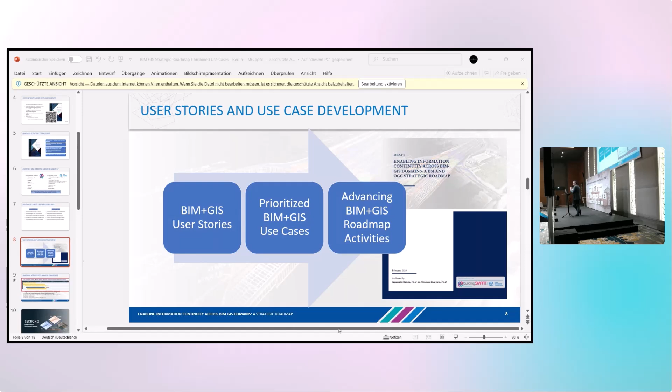So you see sheets in front of you on your tables. You will see a heading. There is a table, and there's a heading to the table. The heading is the use case category. What's in the table is a use case, which is a complete use case that drives a process from one end to the other. We'll get to those sheets in a minute. That's mainly our exercise today.

So the committee met, and we looked at prioritization of these use case categories. We had many categories. What you see across the room is 5 use case categories that we have prioritized. We probably had 10 to 12 use case categories. Under each category, we had distinct use cases. So that's part of the roadmap development, to collect that feedback from bottoms up and prioritize them, and then figure out how to drive standardized toolkits to advance the BIM GIS roadmap activities further from there.

So the first breakout and workshop exercise will be a Menti exercise. I hope you all have your smartphones ready because you'll be using them a lot. Everybody's got one? Okay, I'm sure you all have one. So, all right, I'm going to share my screen now and take you through a Menti exercise.

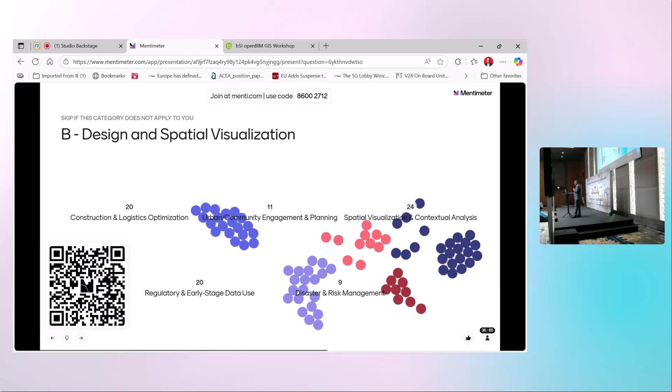So on design and spatial visualization, looks like the lead is with spatial visualization and contextual analysis. We've seen so many good examples, even at this conference, that technology is really changing, and we're able to put our infrastructure into context much better now, whether through standards or through integrated technology sets working together. So that seems to have the lead, and regulatory and early stage data use and construction and logistics seem to be tied. So yes, we have a top 3 definitely identified there.

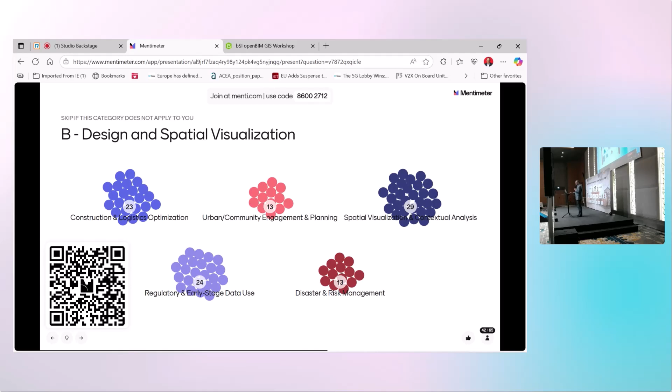And here it is, data integration and requirements. Certainly requirements, particularly on the buildingSMART domain side, our data tends to be contractual in nature. So very important on the requirements and how we put it into contracts, because we are bound in many cases to deliver data that is contractually obligated.

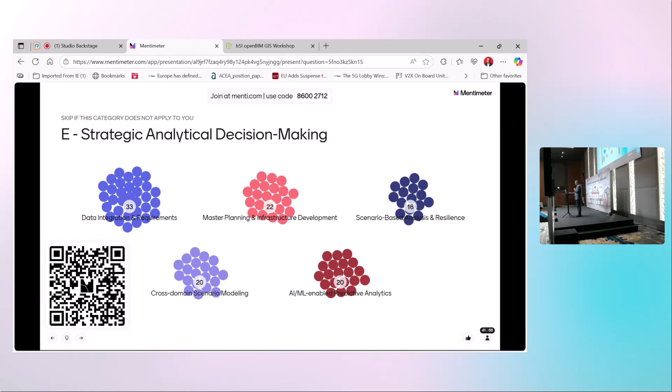Okay, I'm going to switch now. I think we have maybe back to the presentation. Even if you cannot, it's fine, Andre, because that was running ahead.

So I have these 5 use cases. This is the time to sort yourself. Thank you for voting on that. That was very insightful. Now we're going to actually do some work.

We have table shuffle at this point, workshop activity 2. Make sure you're on the table that you want to be at. If you are, we have only 4, I guess. If you are in environmental, you're on the left side. There should be no one on this side of the room. Well, unless they want to, unless you want to hang and change out.

So get your thumbs ready to start doing some typing. Okay. And again, environmental, design and spatial visualization, integrated planning and logistics, lifecycle operations and digital twins, and spatial analytics. I mean, this is where the fun begins, actually. So if you feel like there's a table that you just really have a lot to contribute to, move yourself. If you're kind of ambivalent, stay where you are.

I think as a bonus for your participation, one thing we can suggest is, Mark, I don't know how this will be done through buildingSMART, is we can take the survey findings and share it out to the audience here. Oh, certainly, yeah. So the input that you're going to be doing on the survey tool, in real time, we're going to do a little bit of analysis, but we certainly will summarize and share it with all the attendees. Yep.

Okay, there's the QR code for the second part of this activity. And it should launch a buildingSMART and OGC branded survey. All right, I see thumbs tapping away.

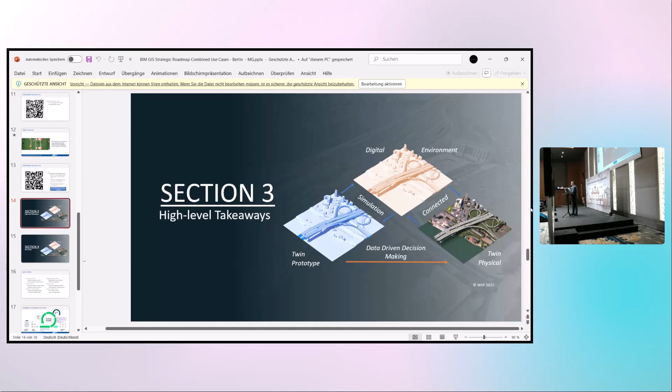So before you do anything, let me explain the rules, okay? So what we're asking you really is, we know that at your table, for example, this table, what's your domain, sir? That's your category, but what's your domain? What's your specialty? Yes. IT, data, right? Data. And yours? Same?

Realty, 3D modeling. For rail, you've got property and buildings. Same with mining. So we know that on a table, any given table, you have diversity in your background.

So when you look at a use case category or a use case, we already know that you'll be coming at it from your perspective, and that's fine. We want you to come at it from your perspective, okay? But you'll be answering these questions.

So when you picked an area, obviously you're interested in it, a category, right? Within that, what we want you to do is pick one use case of the 5 that are listed, if you can. Pick one of the 5 use cases and answer 3 questions. You'll be asked to answer 3 questions in the survey form.

The question we're answering is, what are the biggest challenges or unmet needs related to that use case that you see BIM and GIS integration can actually solve? What are the unmet needs that BIM and GIS have a chance to solve? I mean, obviously, we're here for that integration. That was on the first form.

Okay, so you pick your use case. There are 5 use cases per category. So make sure that you're in the right spot in the survey where you are picking. So if I can share my screen, I'll show you. Don't do anything until the instructions are complete.

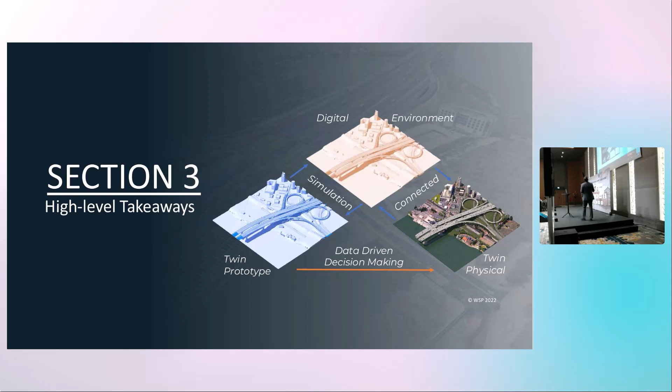So from here, the next steps from this workshop: as a steering committee, still being formed, we have buildingSMART membership already finalized from there. Some members are here, from maritime, rail, and airports. From OGC, we're getting some nominations later this month, so we'll finalize the joint working group.

The plan is to conduct a similar exercise at the OGC International Summit next month or so, and do the same things there. Then we'll pick the steering committee to sort through a lot of these responses, and from OGC as well, and pick the top 5 use cases and prioritize them, or the top 2 or 3 we can advance. This is not something that hasn't been attempted before.

There are big multinational efforts, GeoBIM and others, happening around the world. Projects like CHEK and ACCORD, I think both originated in the Netherlands, are tackling some of these same integration problems at the global scale. We do know they're aligned with the roadmap activities. The idea isn't so much that this is new.